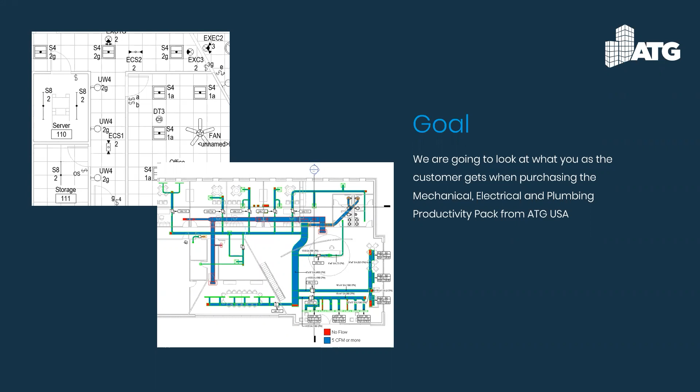So a few of the things that we're going to take a look at here today. Again, determine what you as the end user can get with the productivity pack. We'll take a look at the different types of files that you get with the pack. We'll take a look at the documentation, and learn some of the benefits of those tools that you get with the productivity pack.

But what you do get is a lot of data, a lot of hours put into development for this particular product that we sell, and with the time spent in development, it really saves a lot of time for a lot of companies utilizing the productivity pack. So let's take a look at what's inside here.

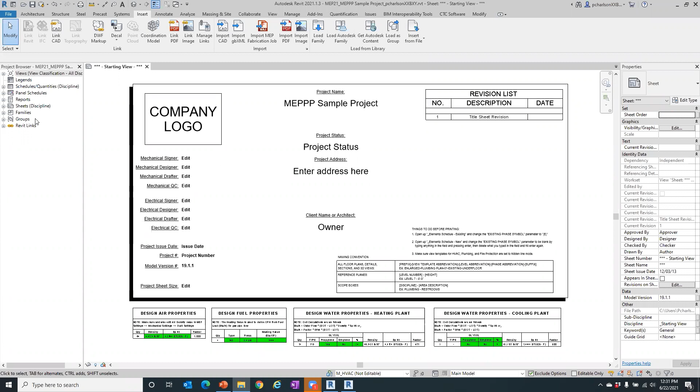Taking a look at the project browser, and we'll go and expand some of these views here. You'll see first off some of the different groupings. We have analysis, construction documents, coordination, project setup, and working type views. So as I go and expand these, obviously we're seeing some of our typical categories of the different types of views that we have. If we expand those out even further for floor plans analysis, you can see we have energy, HVAC, lighting, mechanical piping, plumbing.

And as I expand those, we're seeing some of the different flow values for piping and plumbing within here. We have thermal zone. We have some lighting analysis within here. If we go to our construction documents, those would be the types of views that we go and place on sheets. So we have the fire protection, HVAC, mechanical piping, plumbing, power, site. We also have our symbols list within here.

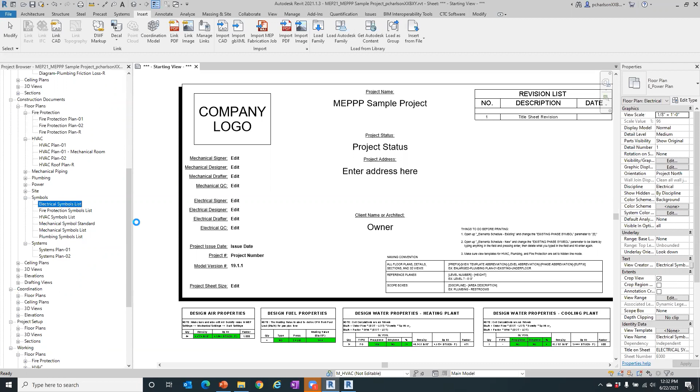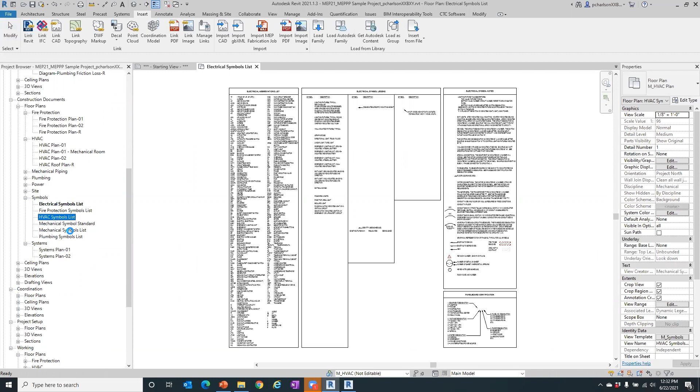We also have systems. If we take a look at our electrical symbols list, so kind of a front page look to a legend. Got our fire protection, HVAC symbol list, mechanical symbol legend, standards lists within here. We've got coordination views. So when we're coordinating between some of the different disciplines, we want to be able to see some of the additional information. As you can see here for mechanical piping, we want coordination for in-floor piping zones, plumbing for penetration locations, roof drainage zones.

We have project setup. So when you're initially setting up the project, you're linking in your architecture, your structure. You typically want to be in a project setup type view, going and placing those. We can take a look at it in 3D views as well. Also taking a look at it in a couple different section views, kind of cross sections through the entire project there. And then we have our working type views. Again, different types of views that are created within here.

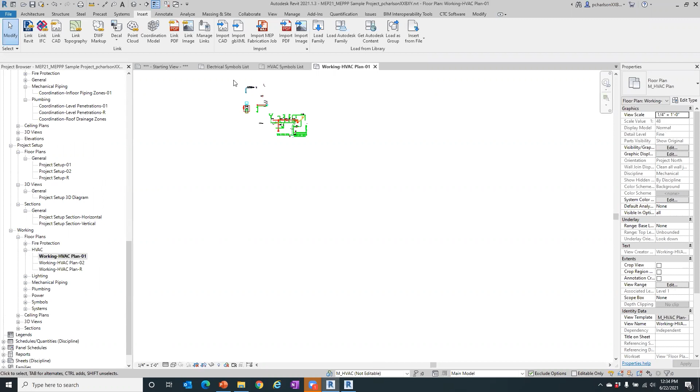I go and double click on my working for the HVAC. You'll see that we have view templates set. This is the M HVAC plan working. By going and clicking on that, you can see a lot of the different view templates that have been developed for the productivity pack. We've got our electrical, we've got fire, we've got some general, mechanical piping, and plumbing. So you can see that they're well sorted within here. Obviously, we can go in and set a specific discipline filter so that we see specifically those types of instances.

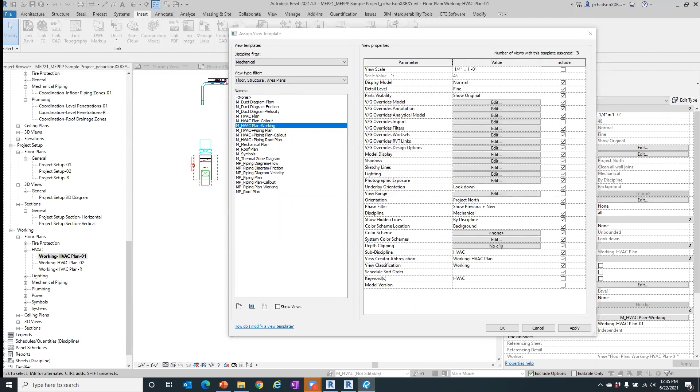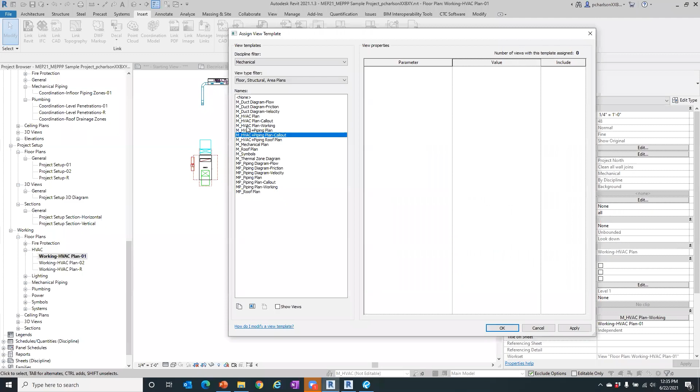So all of these different view templates can be applied to new views that you go in and create. A good majority of the views that are in the productivity pack have view templates assigned to them. When you click on a particular view template, if you look in the upper right hand corner, it'll tell you how many views have that template assigned within your project. So you can kind of see as I scroll through each of these that most of the view templates have been utilized within the project. And obviously we can, again, add more views to that list within there.

If I scroll down a bit further here, we have, again, the different types of schedules. We have MEP, we've got some general types within here. We've got our electrical and mechanical types. If we expand those, you can see they're broken down into subcategories, so it's a bit easier to locate some of those instances. You can see we have ASHRAE calculations for mechanical.

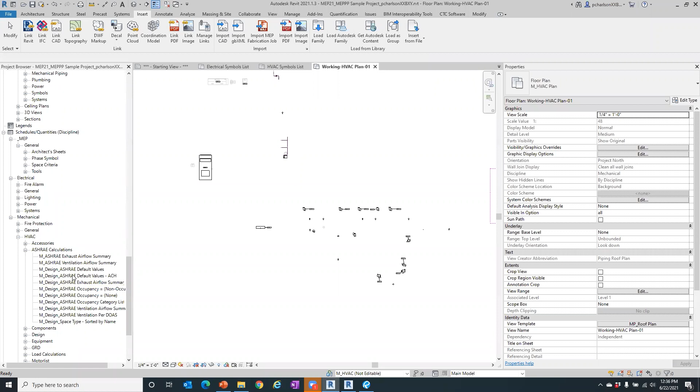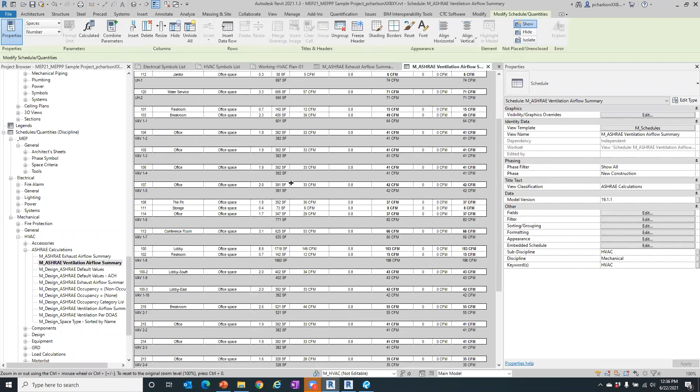We can go in and double click, see what kind of information that we have here. Should have some ventilation airflow summaries here. So for each of the different spaces within our design, we're getting all kinds of data type information there regarding this particular project. We've got some design type schedules within here. We've got our equipment type schedules. Again, quite a few schedules listed within this particular project here.

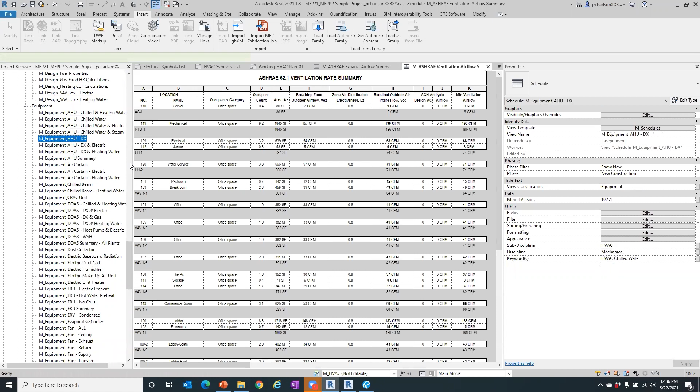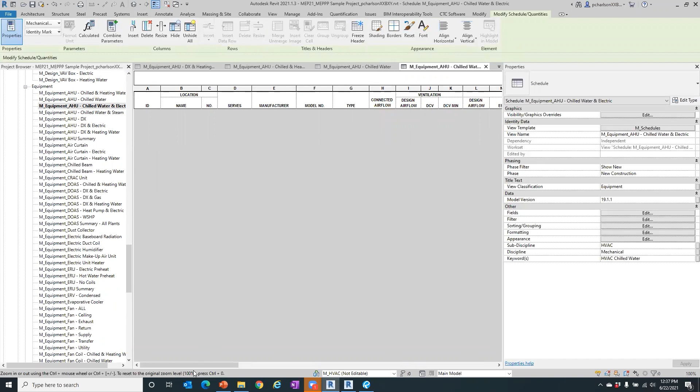Let's see if we got any air handlers. This one. Thought we might have some air handlers in here. Guess not. All right, but each of these schedules that we're seeing within here, you can see this one, a lot of different parameters within there. And I know an air handler can have a very large type of schedule.

And the way that the productivity pack handles a lot of the schedules is they've added a lot of parameters to them, and they'd rather have all the parameters in them and have you remove the ones that you don't want than you getting something that is not quite there and you still have to figure out, okay, what else do I need to add to that?

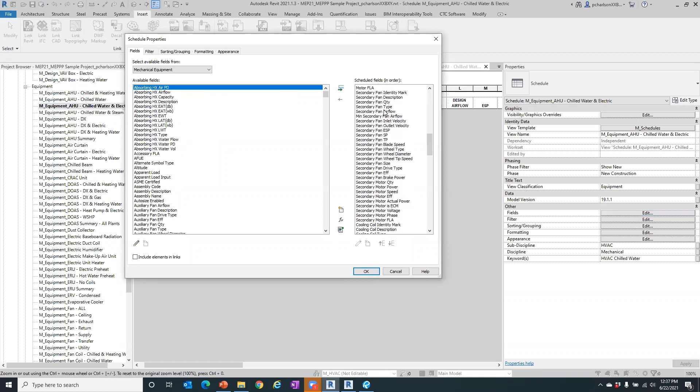So when I have this chilled water electric air handler unit and we go to fields, you'll notice all the scheduled fields that are in here. And this list is actually longer than what we're seeing in the background here in this particular view. If we go to the formatting, what you'll see here is when I select on a lot of these, you'll notice that the hidden field is checked.

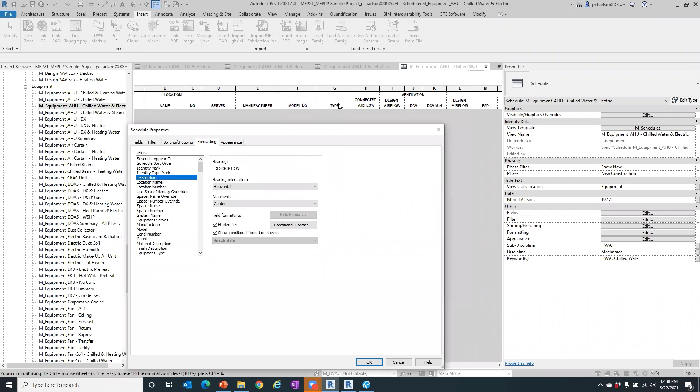What that means is obviously it is not showing or being represented in this view, but if it is something that you do want to show, all you have to do is click on it and uncheck the hidden field, and you have that as an available option within here. Also, you'll see some instances of overrides. Override type items may be if you don't have that information in your project. You just simply want to override it with a manual entry.

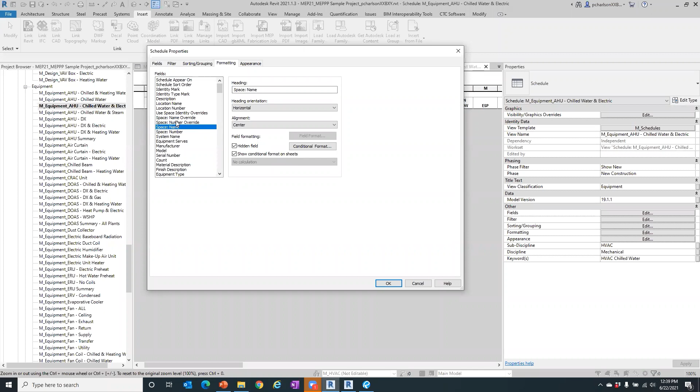For this instance, we have space number, space name. Okay, well, if you don't have any spaces within your project yet, you don't intend to, you may want to go in and just simply plug that information into the cell within the schedule. But otherwise, it will go in and utilize that information. So it's kind of up to you in this case if you want to have that.

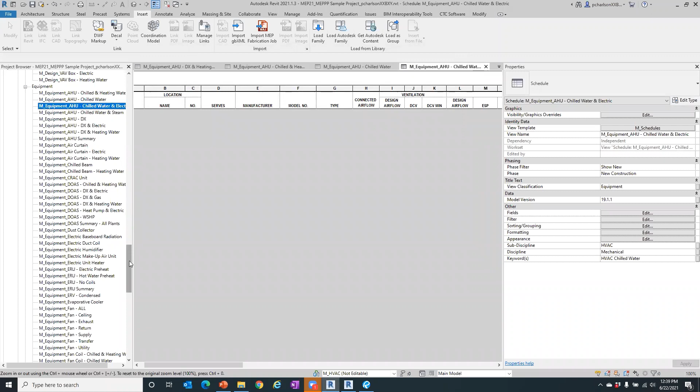So it is a space name and number or a space name and number override instance. Right now, all of them are set to a hidden field, and it's kind of leaving it up to you if you want to show that or not within your project. Scroll it down a little bit further. Actually, let me minimize some of these here. This can get to be kind of a long list within the productivity pack here. So I'm going to just simply collapse all, and we'll come down here.

So we do have some panel schedules in here, some default ones. So obviously panel schedules are put in as needed. You can't create a panel schedule without a panel within there. We have some reports within here. We also have a sheet setup within here. So you have your initial starting view, which we looked at when I first opened up the productivity pack.

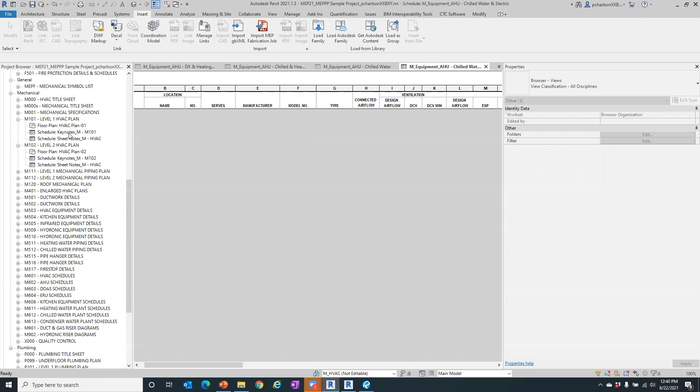We also have a set of electrical. We got our fire protection within here. We have general information from mechanical symbol list. We have our mechanical set within here, and we have a plumbing set within here. So we have kind of the standard title block setup within. If I go and click on the little plus symbol, you'll see that a lot of the views have been placed along with keynotes and sheet notes within the project.

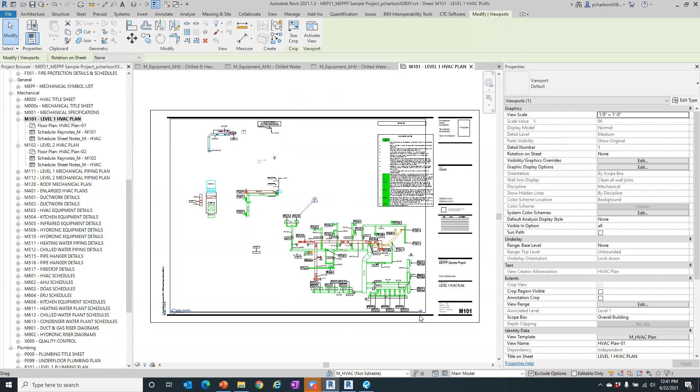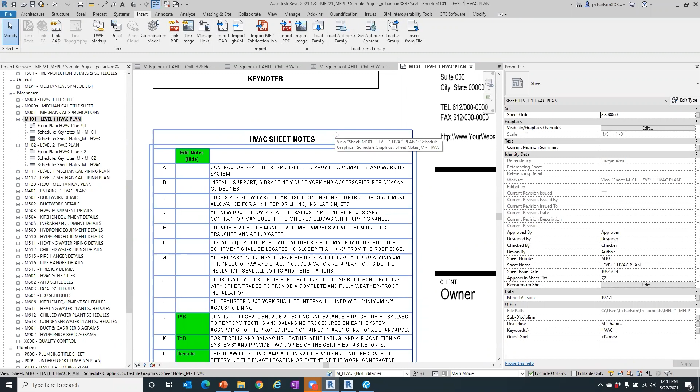So when I go to a particular view, I must not have my ARC background showing in here, but you'll see with this view right here, we've got the mechanical first floor type plan. We've got some general sheet notes. Doesn't look like we have any keynotes for this particular instance here, but they would populate within there as well. Obviously, those things can be customized if you like a different type of text font or something like that. Those types of things can easily be changed.

So going down a little bit further, again, if I expand families, we've got a lot of different types of families within here. If I go to the duct systems, you'll see some of the different types of duct systems that I have within the sample project here. If I go down to the piping systems, we have a lot of different piping systems within here. I think out of the box, there's maybe 7 to 9 different piping systems, but they were not really thought of with all the different possible types of instances for piping that you could possibly have within your project. So those have all been set up within there.

So when we go in and click on one, you'll see some of the instances here. There's been a material applied for this type, copper type piping. It's specified for hydronic supply. We've got some information plugged in here. We also have abbreviations all set for each of the different instances. So when I select on each one, it's going to give us different values for those.

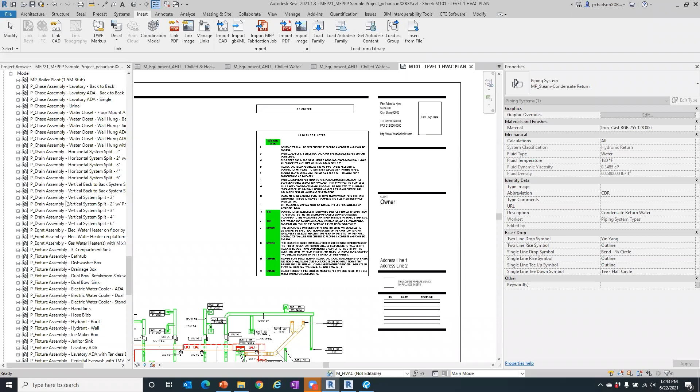All right, so scrolling down even further, we get into the groups. So we have a number of plumbing type groups. As I mentioned before, groups for plumbing are a huge time saver. With all the different groups that we have within here, it's giving you a lot of different common scenarios that you run into. So you don't have to go in and put in a lot of the different types of fittings that you may want to show for a particular assembly. They're already developed within here. So you just simply place the group within a design, and then we can go in and add the different types of fixtures to those.

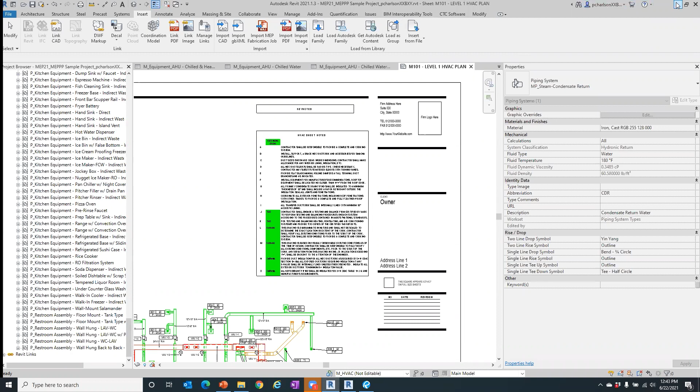All right, I'm going to pop into my actual starter project now. So I'm going to go ahead and minimize this. And right in the background here, we now have our starter project. So this is really the one that you would want to customize the way that you feel your company would best utilize it. With the previous project, some of the things are probably taken out based on the project size. You'll see that this one here is based on kind of an 8-level type system. So if you deal with a lot of 2-story buildings, you just simply delete out those levels, and it'll remove those views from the project. So it reduces a lot of the views within there.

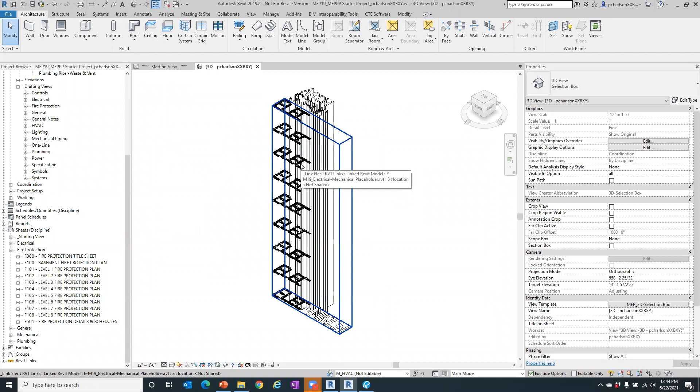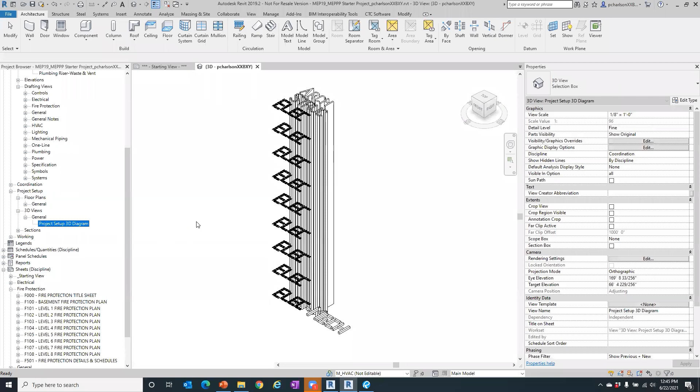If I go to a 3D representation here, we're seeing some unique 3D items. These are actually our placeholders. So when I select on them, you can see here we've got architectural, structural, electrical, mech type placeholders. So obviously we see them pretty clear and easy. We would actually be replacing those with the true 3D objects. If I go to the project setup 3D diagram and zoom in here, we still see those link files, but we're also seeing the levels that we have set within here. So each of those have been created.

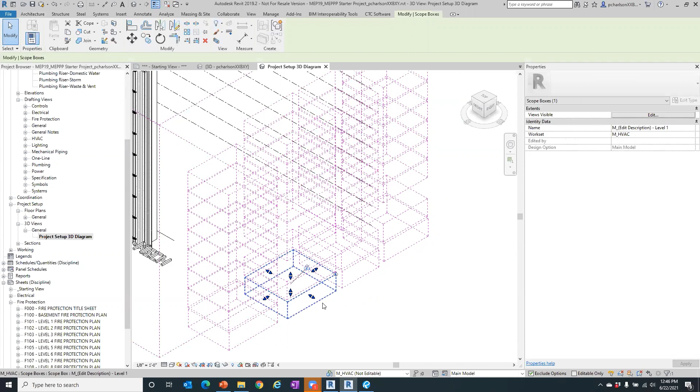You also notice the dashed blocky type items within here. So these are our scope boxes. The larger one here is going to be our overall building scope box. So we've obviously modified that to whatever size model the architect would send over. And then we have all these little ones over here. These are all the different individual system type scope boxes that have been created. So you can drag those to a location and resize them to what you want. So you see those for each of the different disciplines.

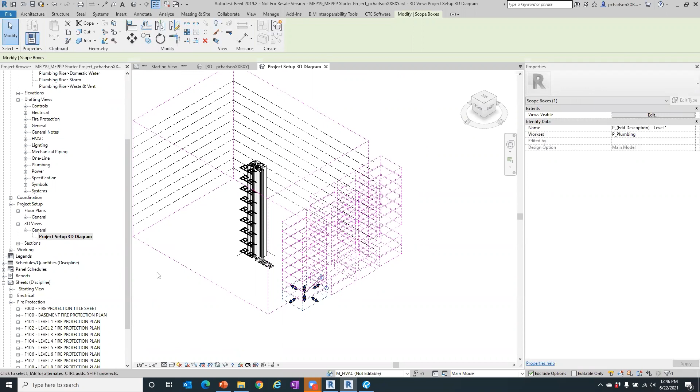I also encourage people to create these for a plumbing type instance, maybe for the different bathroom layouts, for mechanical, electrical, probably the mech or electrical control room, and size those up so that you can create individual views for those. So again, utilizing the project setup is very handy in those initial first stages.

The project browser is right now set up for all disciplines, but if we go to the browser organization, you'll see if you are really designated for a particular discipline, view classifications have been set up for each of those instances. So if you are just strictly electrical, we could switch to a view classification electrical, and we're only seeing electrical type views within the view. Same thing for our other types of instances within there.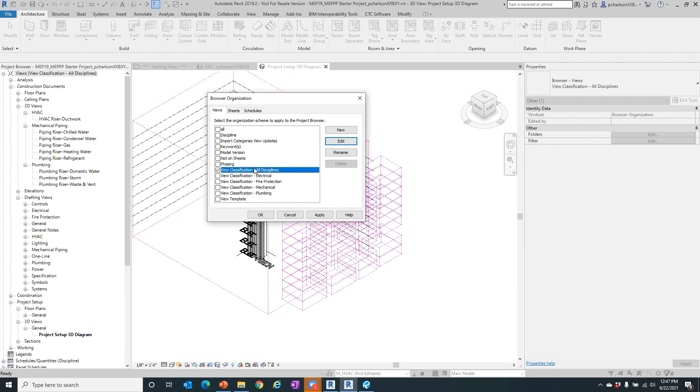So when you get it, obviously it's going to show all disciplines. Don't really want you to call and say, hey, I'm mechanical and all I see is electrical within here. What's going on? So you will have it set to all disciplines when you initially see that.

Now with the views, and also kind of tying it in with the view templates and view filters, if I go and click on my filter tool, you'll see that we have a lot of filters created within here. So the filters obviously help to show specific type items within views. So the filters and the view templates kind of work together in that instance.

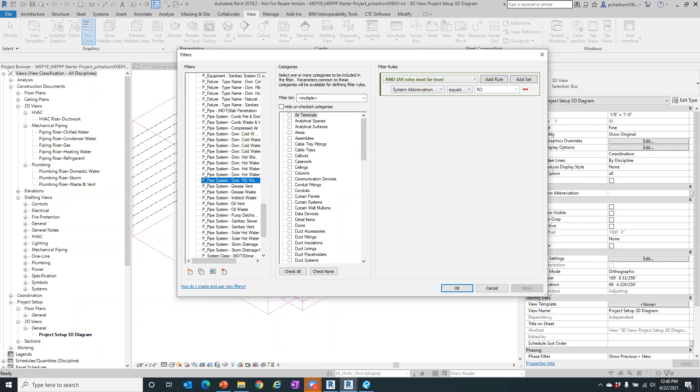You can see that the filters, first character is obviously what type of filter that we're looking at. So we got electrical, we got fire protection, we have general, we have mechanical within here, mechanical plumbing, and then plumbing type instances. So those different types, when I go in and select on them, you can see that a lot of them are designated here for system abbreviation. So if it includes that type of abbreviation for that pipe system, it will go in and show it within that particular view. So again, a well thought out type instance there to look at that information correctly.

Again, the schedules kind of showed you a little bit of that information. Again, we have each of the different types within here, electrical, mechanical, and then breaking it down into individual types of components beyond that as well.

I want to take a quick look at the user guide. So let me go back to that, and I want to open up just simply the user manual. Go here and user manual. And actually, before I do that, I'm going to pop open the starter project setup. I don't want to forget that, because that's kind of a really nice tool to start using as well. So this is a step-by-step guide telling you exactly what you need to do to really start your project with the productivity pack and get it set up for all users.

Now you're probably looking at it, it's like, wow, there's a lot of directions in here. And that's a good thing. It's not a bad thing. You want to be able to have some clarity as far as, okay, what do I do for this next step? What do I do for the next step? We spell that out within the instructions that you're seeing here.

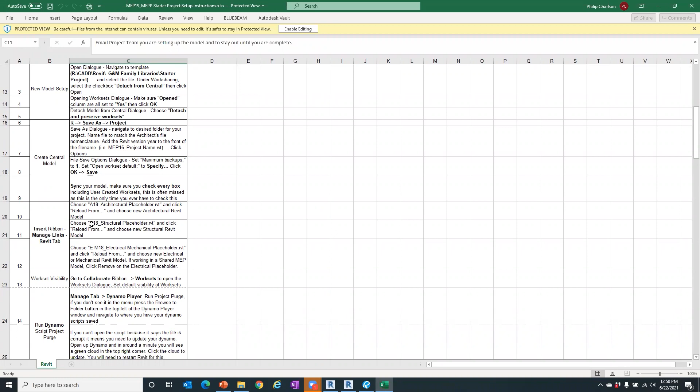So again, a lot of the locations that you're seeing in here, those are types of things that you want to go in and tweak to set it up for your locations instead. So that's why we have an Excel file here that you can go in and enable your editing, modify it, and put it in a location where users can access this and go right through and set up a project with the productivity pack.

All right, on to the user guide. So I'm going to double click on this here. And let's take a look at our user guide here. So as I mentioned, this is a 330-page manual.

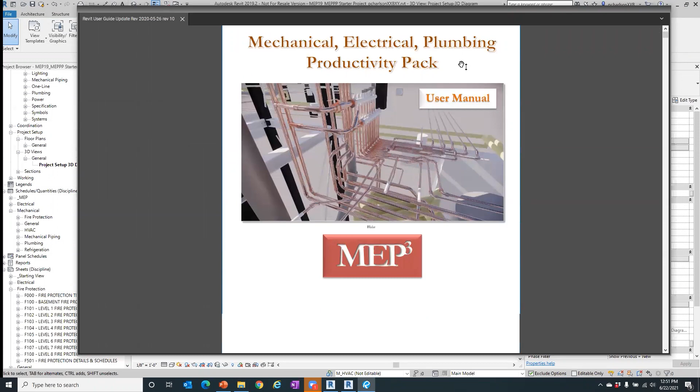This is the cure for insomnia. If you want to fall asleep at night, go ahead and start reading this before you go to bed. I'm not saying this is bad information. I'm just saying that it's not going to be the most exciting type information to read cover to cover.

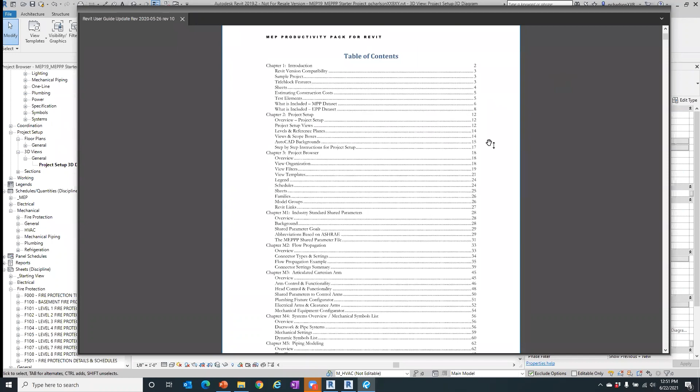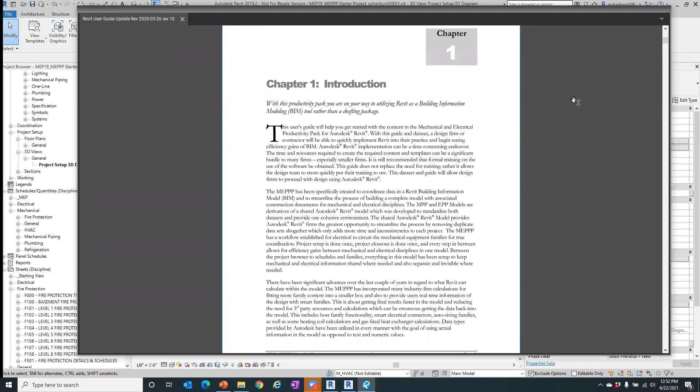But it does have a lot of good information in here to help you succeed with the productivity pack. So it has basically everything that you can possibly think of. At the beginning, you have a table of contents so you can locate where specific information is, so you don't have to do a whole lot of searching within there. If you're using, let's say, Bluebeam, you can search for specific keywords within the list here.

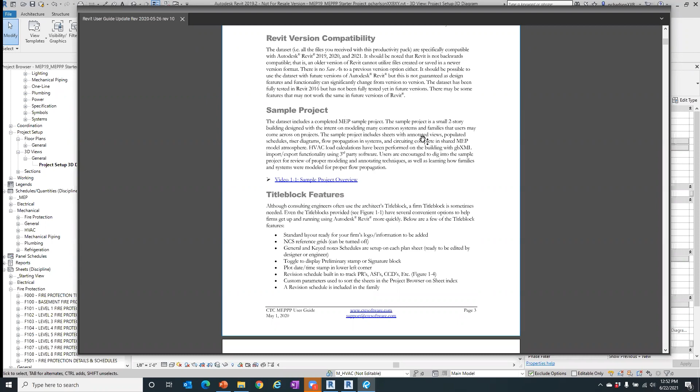As you look through the user guide, you will see the links here for the YouTube videos. So when you double click on it, basically it'll pop open YouTube and give you a short presentation for that specific item that you're looking for. So in this case, it's just looking at the sample project, which I just showed you. So don't even have to click on that one. So I just saved you some time there.

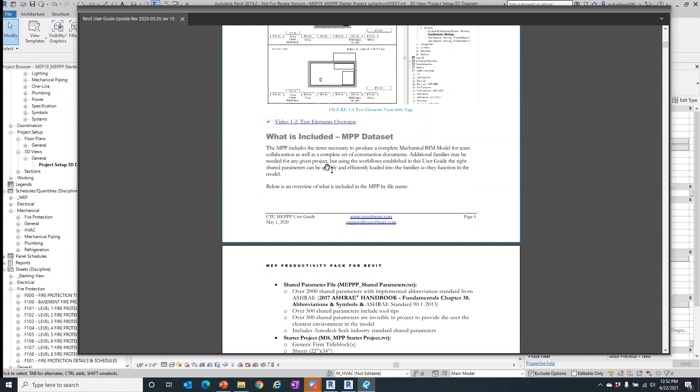Here's some information on title block features, sheets, text elements. So where is it located, the different data sets. So when you're looking at this user guide, you'll actually see that it's kind of split up, mechanical and electrical. Electrical's in the back half of it, but it is kind of giving you a rundown of all the information that is tied into the project here.

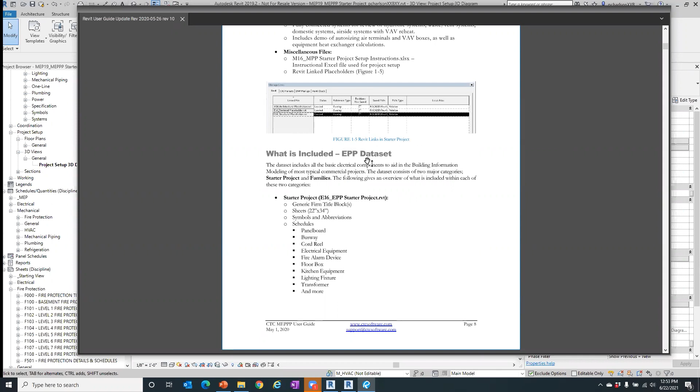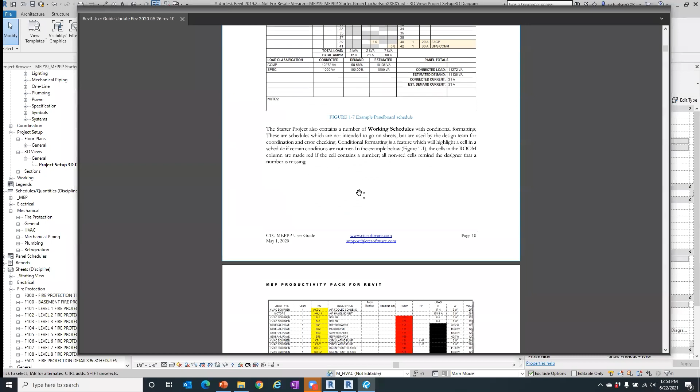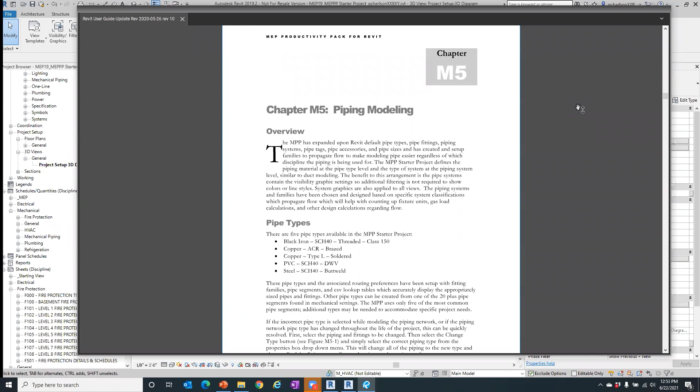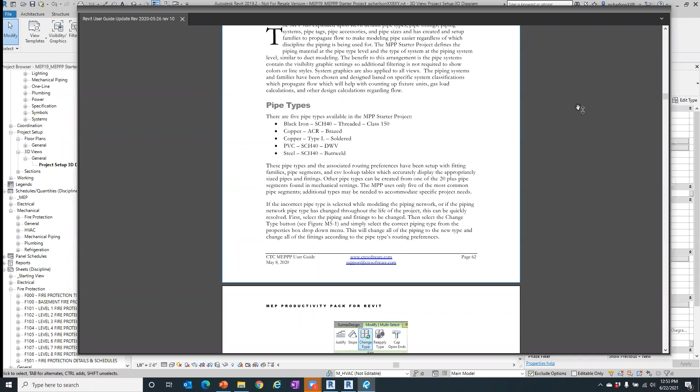So you see the MEPP and the EPP. That was the mechanical productivity pack and the electrical productivity pack. So basically those two were combined into the one MEP productivity pack. So we're seeing that information tied into there. So obviously, if you get the productivity pack, make sure that you are looking through this. Again, probably not all in one shot, but a little bit here and there to kind of pick up some of those new features. Obviously, you're not going to be 100% proficient with the productivity pack right from the start, but you will get there with time.

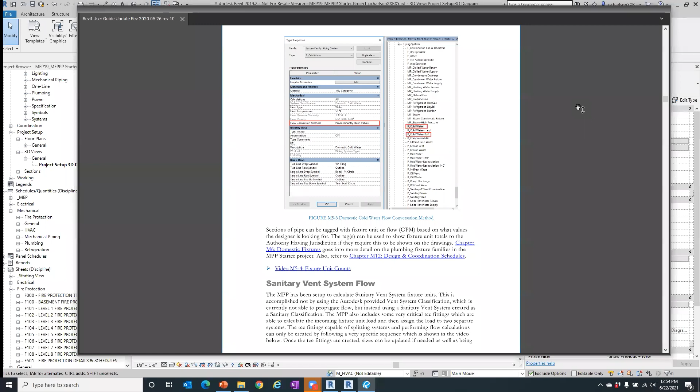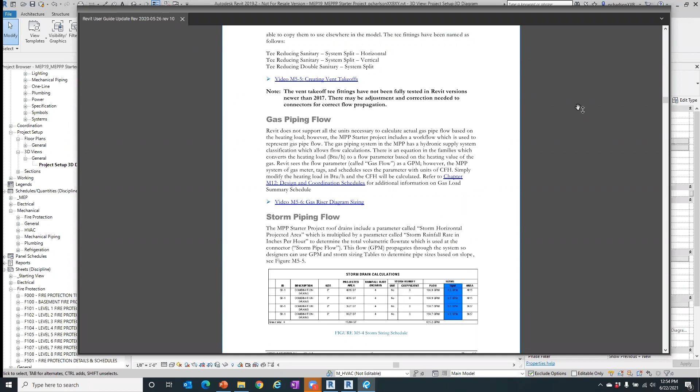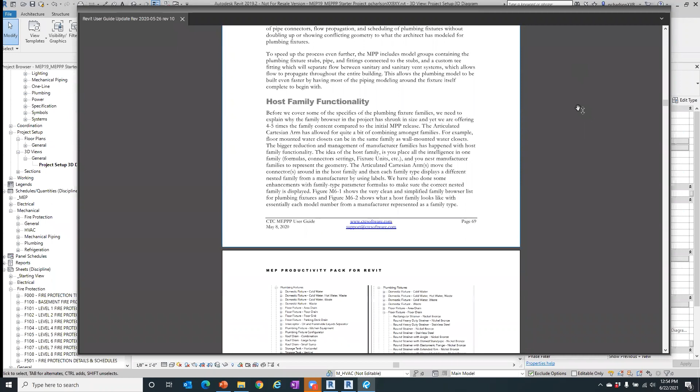Again, I will say that with my 20 years of experience working with the reseller, I wish I had this as an option for customers because it would save a whole lot of time. The cost of this is very cheap compared to how much time a user can put into trying to develop this on their own. And again, what you get with the productivity pack is not going to be 100% complete to the way that you may want to have it. There's still going to be some modifications that you're going to want to make. But again, it is a great tool to have under your belt and use for projects going forward.